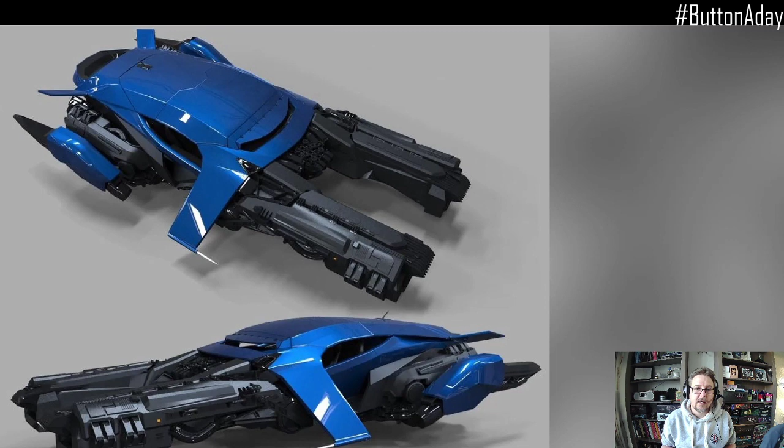It looks like a scary project, but we are gradually breaking it down bit by bit, day by day, and yeah, don't panic, we'll get through this together. So let's open up Fusion. This is where we got to now.

In yesterday's video, I was desperately trying to show you guys how to do a 3D spline for our ribbed hose feature that we have down here, and for the life of me I couldn't work out why it wasn't working. I'm just going to cover this straight away. Let's turn on our edges again so we can see what's going on. There we go. We have to activate the ability to do 3D sketches in Fusion.

So if we go up to, click on your username at the top and then into preferences, there we go, and under design we've got here allow 3D sketching of lines and splines, and we just want to tick that and choose apply, followed by OK.

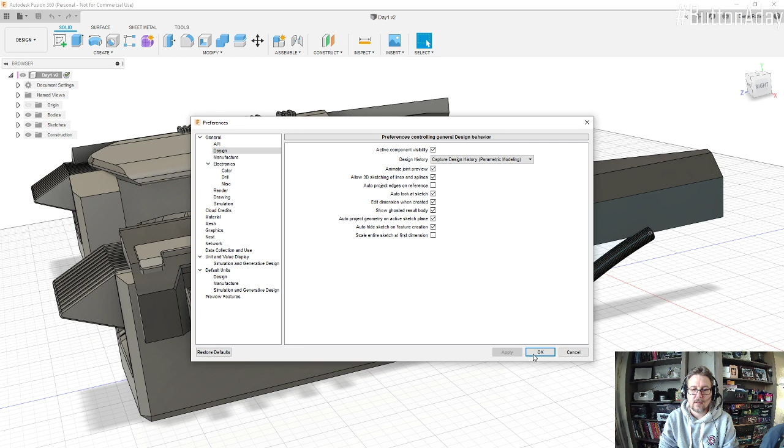So now we should be able to click on any of the points on our spline tool and then move them in 3D space. You can see it's now changed our pattern along a curve feature to match that spline as we've now changed it. So yeah, that's all good. I'm happy that now works.

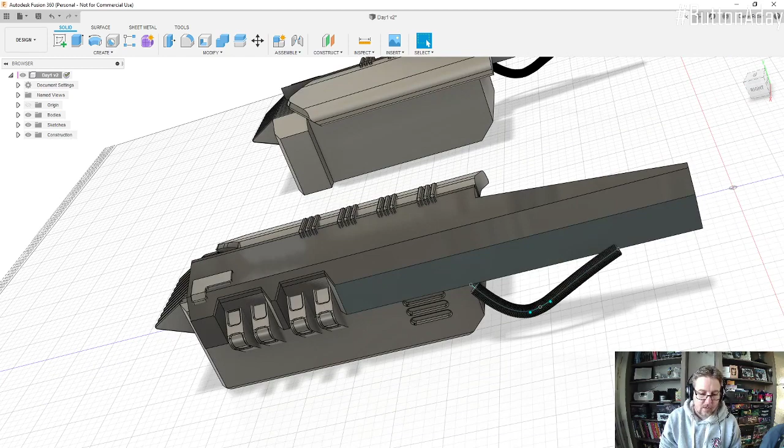So if we call up our reference image, what we're going to try and cover today, zoom a little bit more, okay, is this hose section here that we've obviously started. It goes up around here by the looks of it, we'll make a nice little round end cap on this side, and we'll put a round end cap on this face here, and then we'll change that spline so we get a nice neat curve coming round of it. That'd be a good thing to do, I think.

I'm reading this space here as a void. Maybe that's just shadow in there. Maybe there's something going on here. Again, we'll try and interpret that. We'll try and get into a bit more of this back section here, just so we can start sort of joining all of this up. Yeah, okay, let's go.

So I'm going to wind backwards through our timeline. So if you've got a timeline that gets quite long and it kind of fills up over the length of the bottom of your screen, you can use these little controls here. So this will move straight to the end, and then we can find our little pickup point so we can move backwards. Let's get rid of our mirror. That's our pattern along a curve.

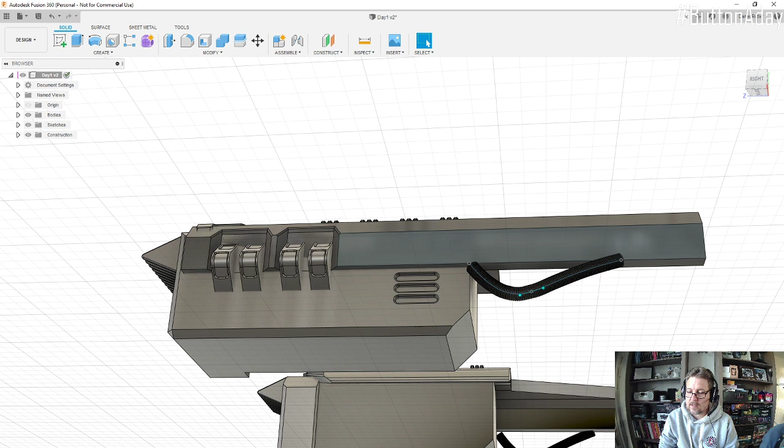We'll go to there. So we've just gone to before we drew our spline. And that's because I want to make some reference circles, and then we're going to go back to the spline, and then we'll move the spline to match up with those circles.

So if we start a new sketch, click on a face. I'm just going to draw in a little section in here. We can give that a dimension by pressing D. Make that 90mm. We can reference it to a line so we can move it about later.

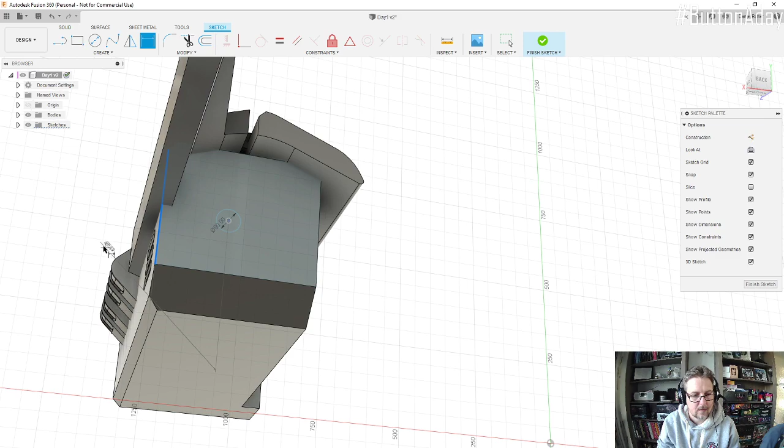Okay, so this sometimes happens. I'm sketching up here. Now this will be because we now have 3D sketch enabled, which is here. Okay, we all make mistakes. Let's delete that. Start again, click our circle, we'll turn off 3D sketch, then that way what we're sketching is always staying on this plane.

Spin that back round. 90mm. Can reference that. So from the outside edge to the center.

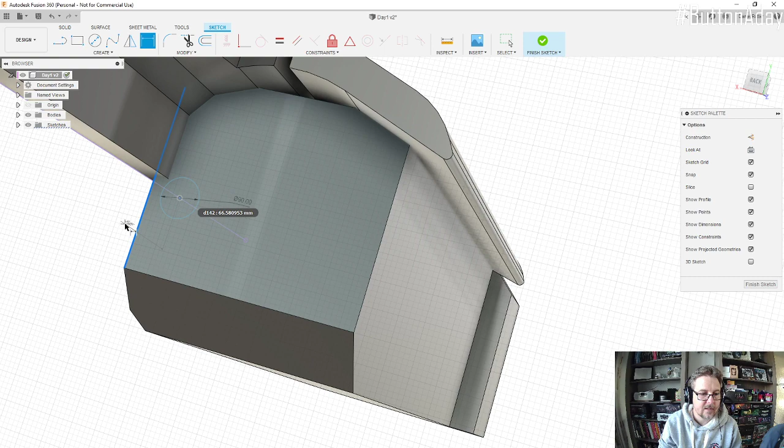I'll change that to 0. What I'm going to do is finish that sketch, then delete that sketch. And most importantly, we're not going to panic.

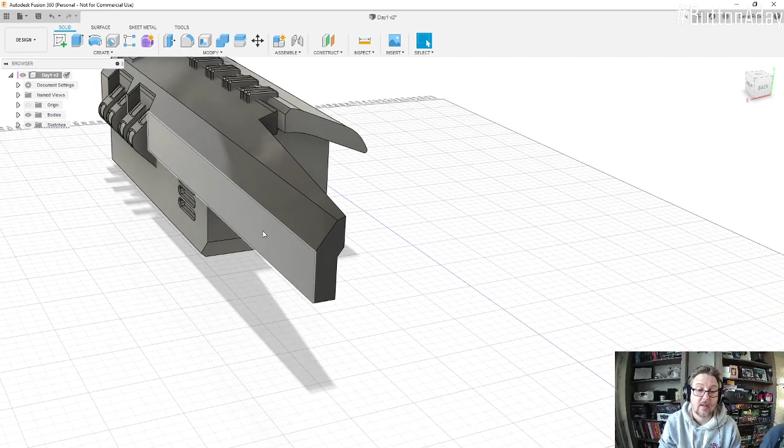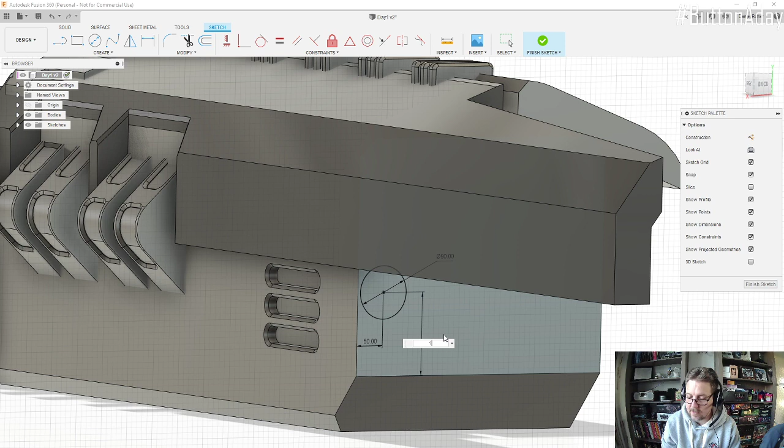Create a sketch, choose this plane, have 3D sketch turned off. Specify our distance, so it's a 90mm circle. There we go. Because I started the sketch with 3D sketch enabled, that's why it stayed like it even though I deactivated it. And then we can change the height, I'll bring that down a little bit, say 130.

Finish that sketch. Extrude the shape just a little bit, maybe 15mm. Make it a new body. Okay, just got a little chamfer detail around it, something like that. Okay, that'll do for starters. That's where our hose is going to plug into.

I'm going to put one on the side here. Now we don't have anything to draw that on at the moment, so we might just quickly block out this shape underneath. So go back to Fusion, start a new sketch on this underside face, and we'll just pop in a shape for now.

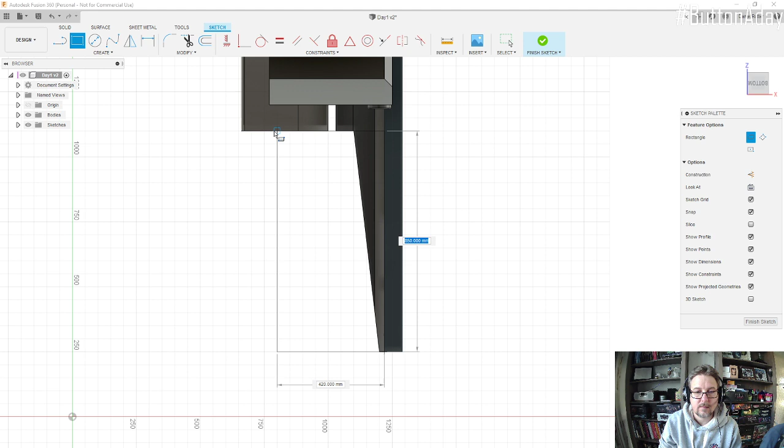Something about that. 550. Let's try that again. Double click 550. There we go.

I want this line to be in line with this. Now, if I knew that measurement, I could specify that here. Or what we can do is use relationships. So if we select one line, hold down Shift, click on the line we want to have a relationship with, and then we'll choose horizontal, vertical. Or we can do coincident.

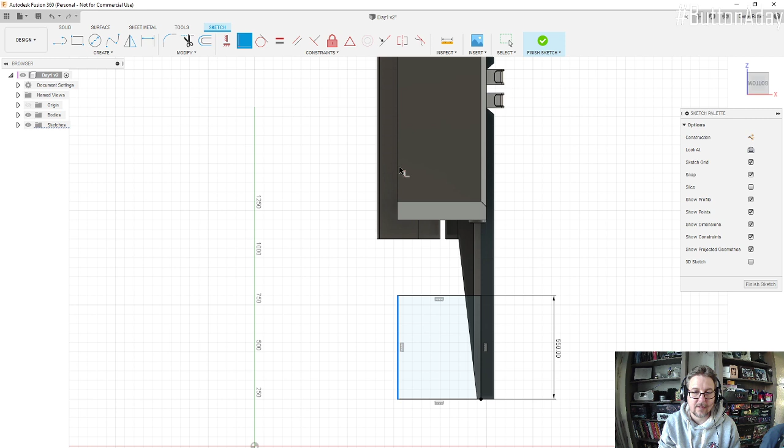Select this line, hold down Shift, and choose this line. Why does nothing like me today? Let's try this again. Equal to, parallel to, perpendicular to, collinear. This line and this line.

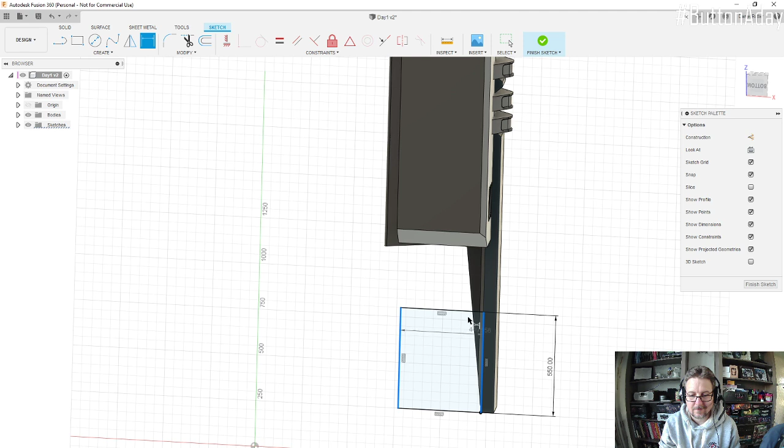Do you know what? Let's just add a dimension. 550. 500. Okay.

Finish our sketch. Go up to extrude. Select our object. Bring it down. I'm going to leave it as a new body because I'm going to go back and slice this up and make it look a bit cooler. I just want a surface at the moment to work on. So press OK.

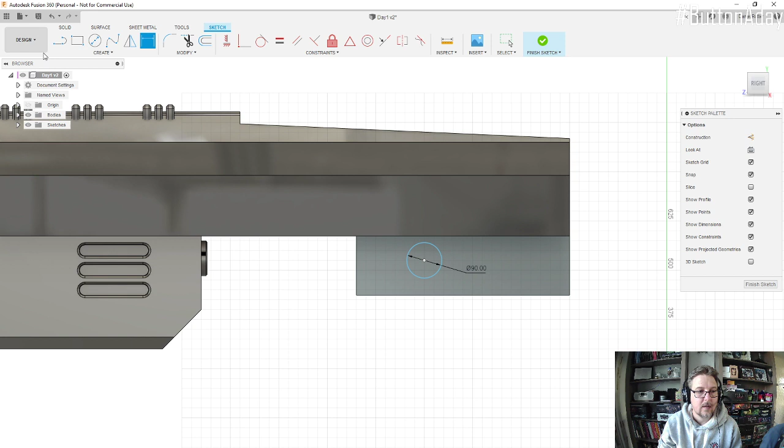Once again, create new sketch. Select our surface. Draw ourselves a 90mm circle. Once happy with that, finish the sketch. Extrude the shape, did 15mm before. Keep it as a new body. Okay, add a little chamfer. Okay.

So now if we move our little timeline along one, we have the sketch for our spline. And if we edit that sketch, we should be able to select these two parts here. We can delete this relationship.

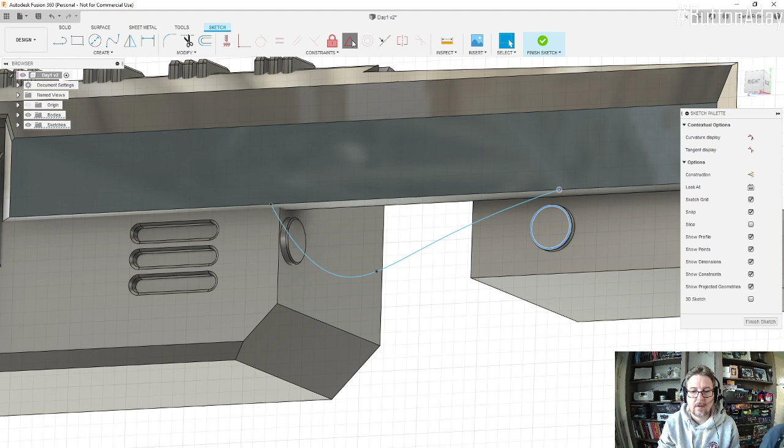Tell you what we'll do. We'll come back again. And we're going to create a construction axis. And we are going to do this as an axis through a cylinder. Do that. Okay.

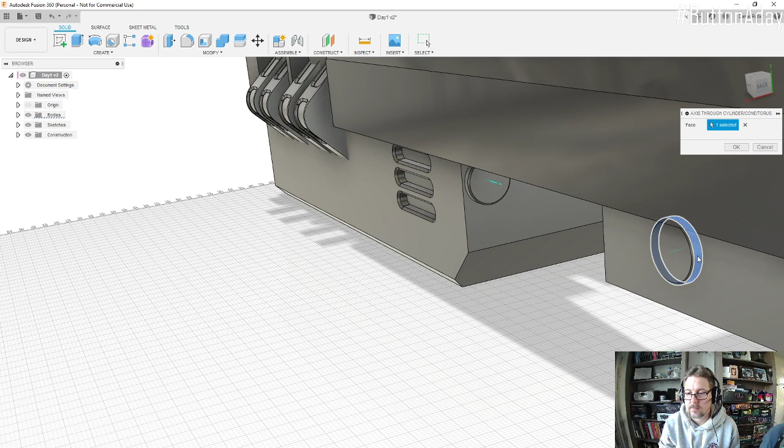I'm going to create another one of those over here. Okay. Back to our spline tool. Edit the sketch. Select these both points by holding down Shift.

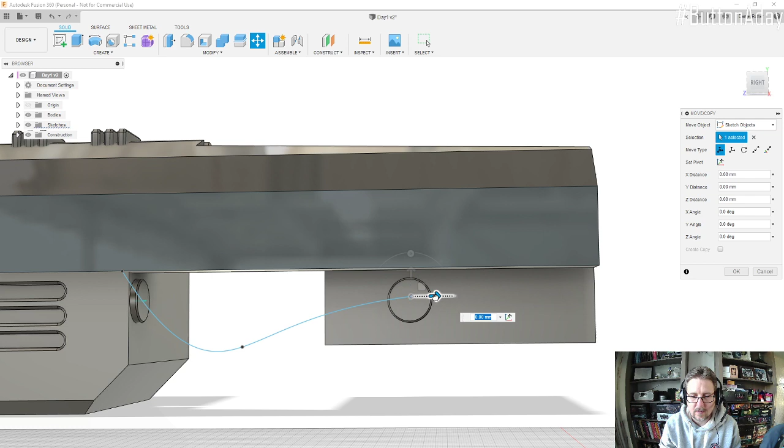So what we're going to do, we're going to finish the sketch. We're going to grab our move tool here, and we're going to manually just place these in. We shouldn't have to do this. I won't lie to you, it's annoying that we're having to do this now.

All of that, we'll grab this end, move that down. Doesn't want to move. Okay. Edit that sketch.

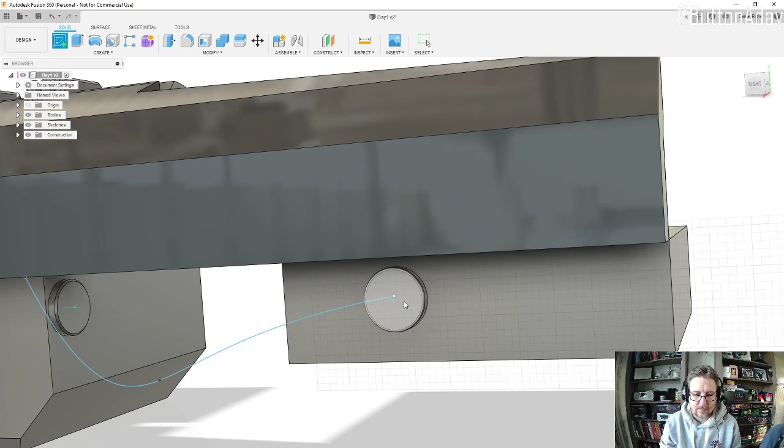Finish that sketch. What we're going to try, we'll do another one. We'll create a sketch. We're going to select this face. Use our spline tool. I'm going to select from the center out to a point, and then back to a point. And this time we will turn on 3D sketch.

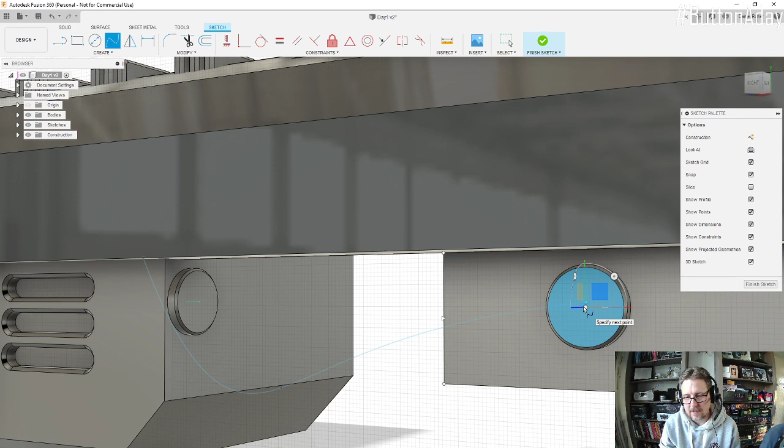Create a sketch, select a face, 3D sketch is on, spline tool. I can select that point there, we'll come out to this point here, rotate round, snap, and we're going to come in to that point there. Oh, magical.

Double click, and now we can grab hold of these endpoints, these green points here, and we should be able to move those around. We have actually created a 3D sketch, which is something at least.

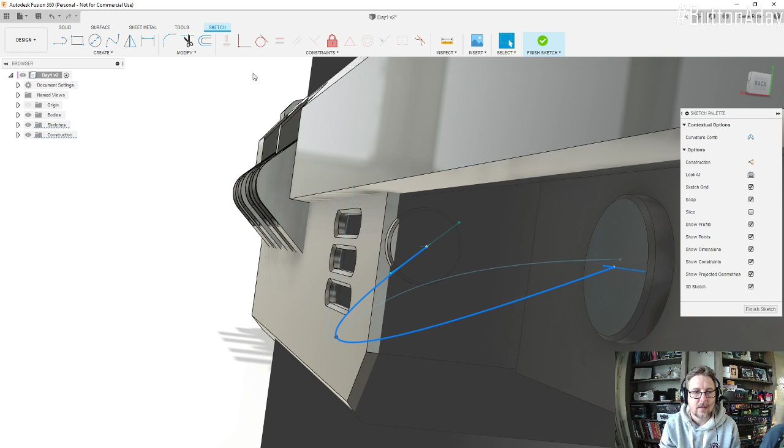Select this tool and this line, make them tangent to each other. That's what I'm on about. Okay. And then we can select this line and this line, and again make them tangent.

Alright, finish our sketch. Now to save any confusion, because there's bound to be some, we will hide our spline that we've got here. We'll click on our sketches tab, select the spline, and we can just hide that. And we're good.

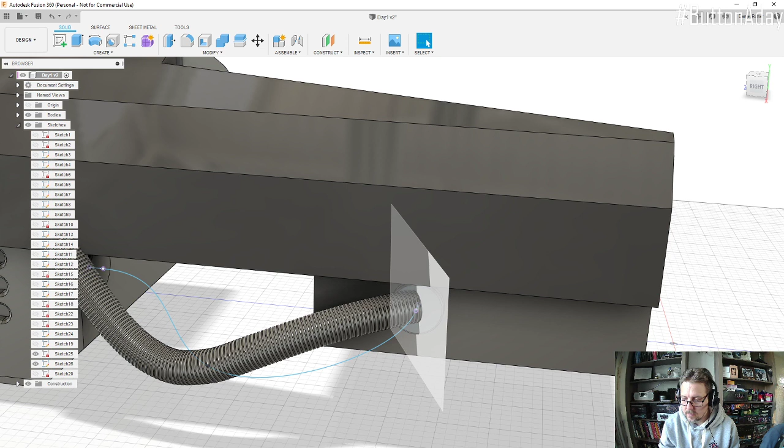So let's go through making our pattern along a curve again. That was our original one, and I'm just going to delete all of these features, including the combine. So delete. Yes, I do wish to delete. Okay.

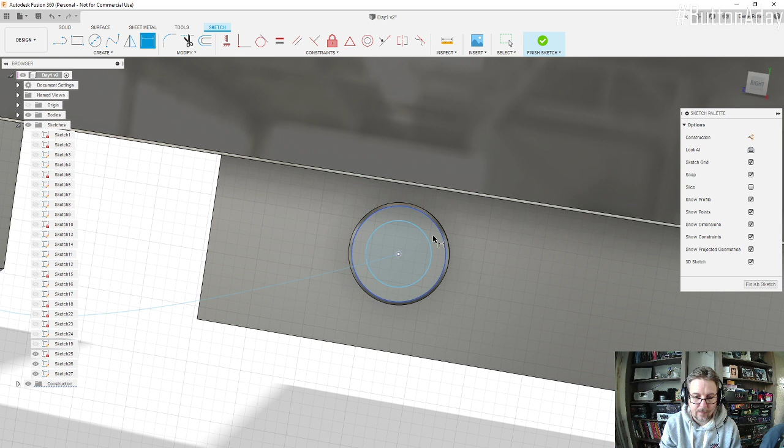Create a sketch. We don't need to worry about making one tangent or in line with the spline, because we've already made this spline in line with this face. So we'll start a sketch on that. We'll do our one rib of our hose. Let's make it like 60 mil. We will go finish sketch.

Extrude. Make sure we pick the right shape. There we go, give that a thickness. Let's make it a little bit chunkier this time around. Let's go 12. Now that's my thing of always pressing enter after I type in a number, and that not necessarily being the correct thing to do.

So we'll edit our feature, and instead of join, we'll have that as a new body. So we can now add a couple of fillets again, so we can just make that look like a rib. That looks good. Okay.

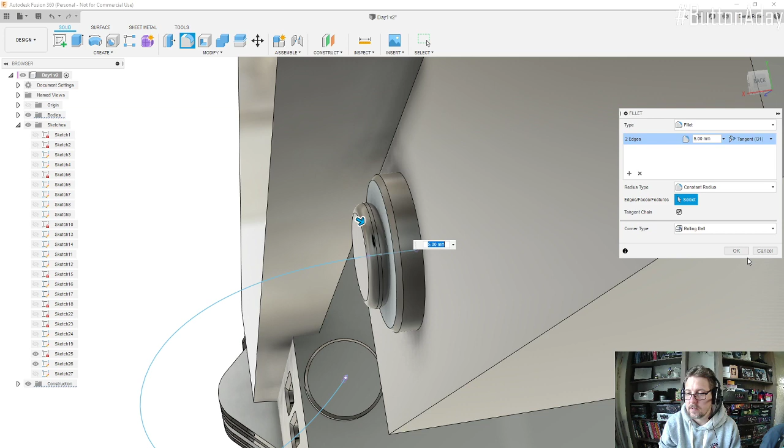And then under create and pattern, we have pattern on path. We want to pattern a body, so we can select the body and then we can select the path. We want to pattern across the entire distance of the curve.

Just rotate round and we can just drag this around like so to the end. And again, you see how these are obviously pointing the wrong direction. It's because we've got the orientation set to identical. So we change that to path direction and now they will follow the path around nicely.

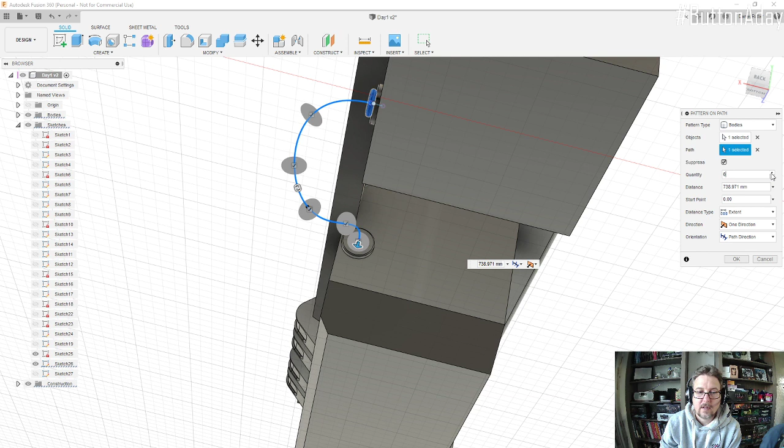And then we just up the number of repeats until everything intersects. I think we did about 80 last time. That looks pretty good. Once we're happy with that, we press OK. And there's our hose.

So if you remember, we now have a huge list of bodies running down here. So we just want to check where our first one is. So we can select it. And that is body 182. And our last one is bound to be at the bottom of the list. Yep, 261. So we can go to combine.

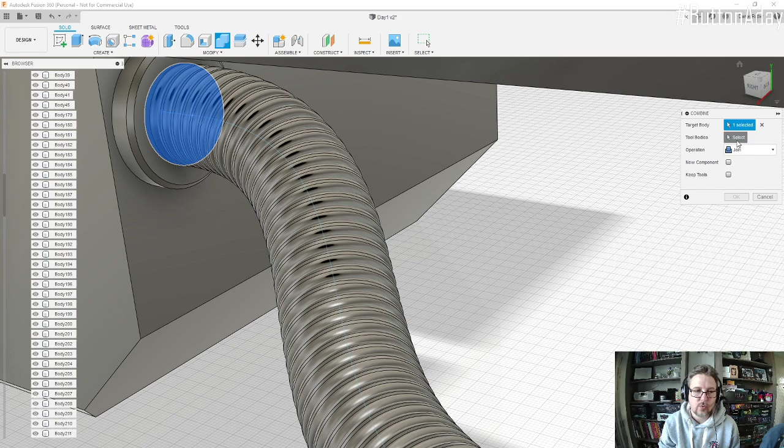181. So just press down shift and select the toolbar. Okay, right, so I did this last time as well. Target body, we have to select a target. In this case we'll keep it as this end one, and then we have the tool bodies, which are the bodies we wish to add to it. So we'll select 181, no, 182, there we go, get rid of that one.

And then come back to the list, hold down shift, and that should select everything. Everything's set to join, we can go OK.

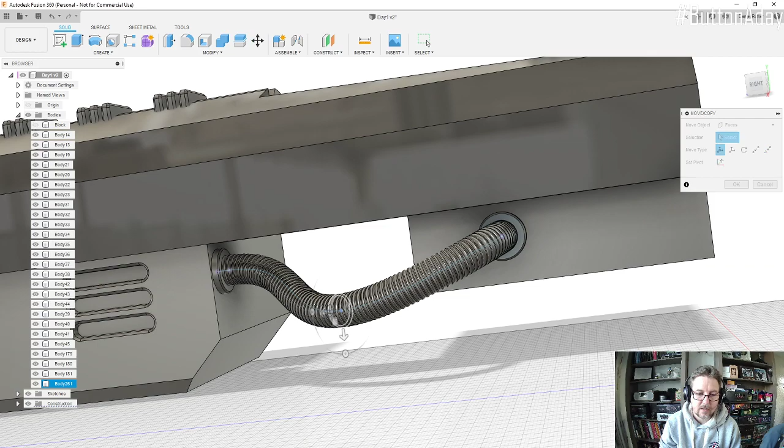So as we were doing earlier, we can now go back to our spline tool, this one here. We can choose move, we can grab hold of this bottom part, edit the sketch, select that part.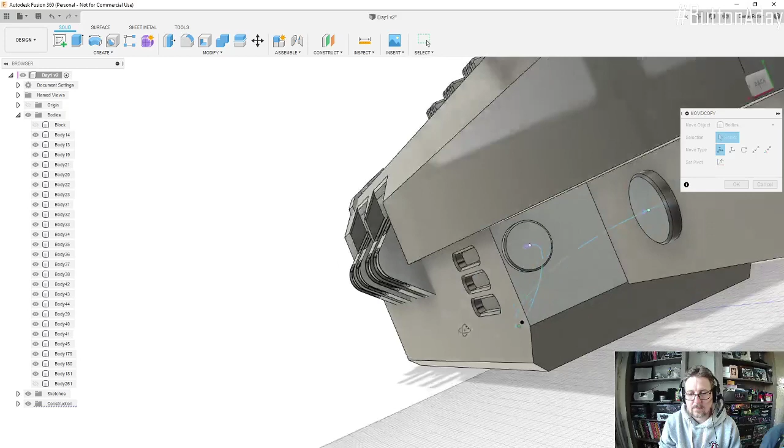Oh, ever had one of those days. Hide the body, let's do that. Edit the sketch. I like it as it is.

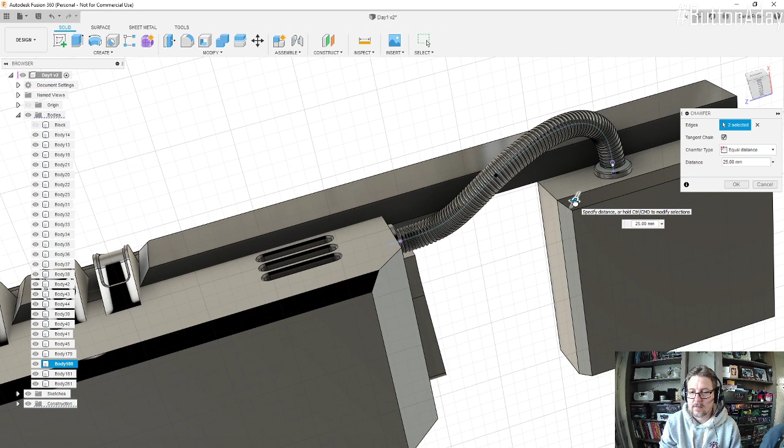Right, okay, let's start adding a bit of a chamfer detail to this. Now, we should do that using the chamfer tool. And that should be quite interesting if it just goes slightly beyond where our plug is. Instead we just have that now running straight back in.

So let's start a new sketch. And here, go to create, project. I want that information there, so I've selected that face. Okay. Finish the sketch and extrude, run that in like so. In this case we'll have that join. Nice.

So there's a detail just on here, this piece. Let's make that line a little bit bigger. There we go, this piece here.

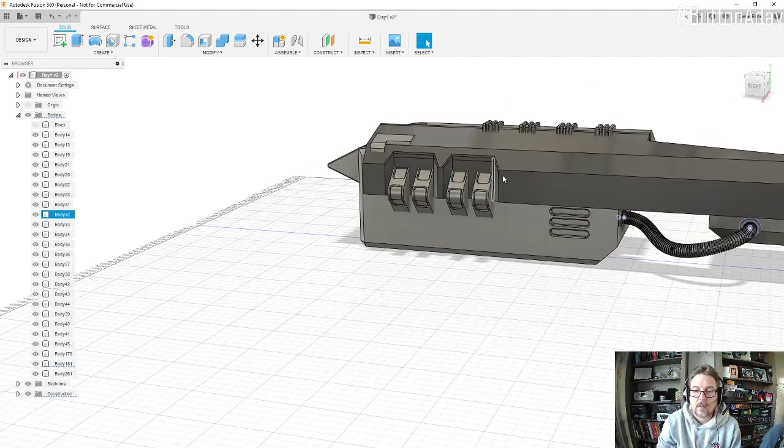Now what I'm thinking is we'll take a general shape, extrude it across, and then we can use the draft tool just to change the angle, just so we get this sort of subtle slope running down from it. So let's choose our front sketch. We'll draw a shape. We'll turn off 3D.

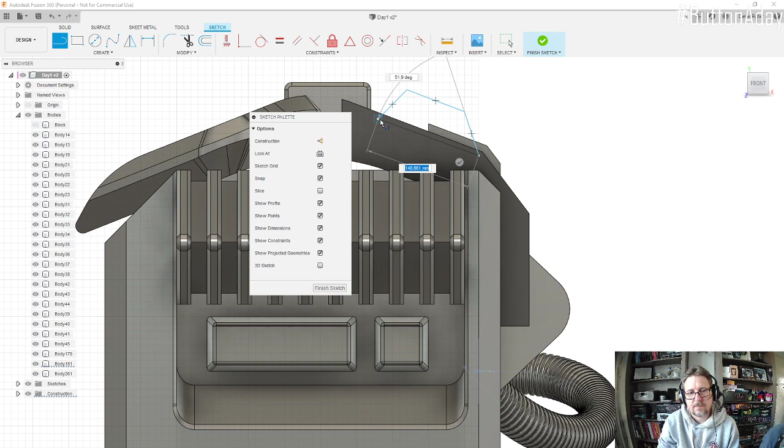I don't like this 3D sketch, it's really weird. We'll draw a shape, it looks like maybe it's something like that. Again, just sketching stuff out, not being too precious about it.

Finish our sketch, extrude, choose our shape. We want that to be a new body. I'm going to change the offset.

It starts slightly further back than that, so maybe go -500. Yep, something like that. Okay.

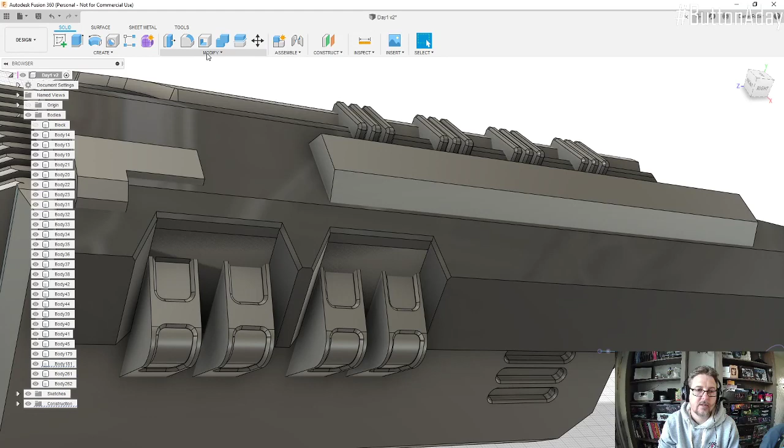Now we looked at the draft tool before, briefly. We'll have a look at it again now. So under Modify and Draft, the first face you select is the one you would like to stay at its orientation, and then the second face is the one that we're going to move. We get this nice little tool here.

Just notch that around just a smidge, maybe -5 degrees. Oh, too much. -2, -1. Yeah, that looks pretty good.

Click OK. Do the same thing again. Draft tool. This face followed by this face, and then we'll do the same thing, -1. Okay.

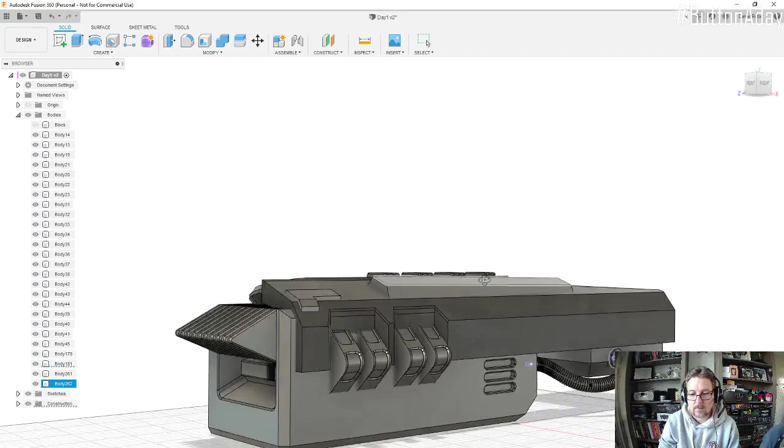Gives us that. We can add a little chamfer on here. Yep. Okay. Sort of starting to look like something. Okay.

So I said we would look at this round section here, just so we've got something going at the back, and then we can work out how we're going to connect this front section to whatever's going to happen at the back here. So we can look at sort of where that is.

Looks a little bit further down, almost resting, almost at a tangent angle to this, maybe a little bit higher. So let's just draw something in and see how it looks.

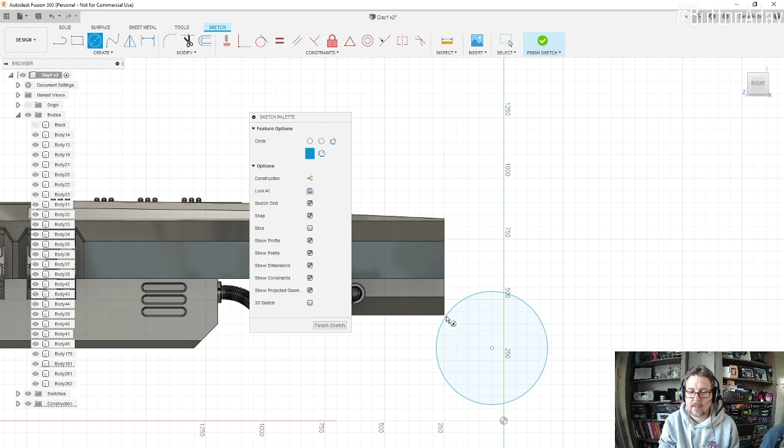So create sketch, choose our plane, make sure 3D sketch is off unless you need it. I'm going to go about here, or maybe a bit smaller than that. Let's try 400.

Hit escape to come out of our dimension tool, and then I should be able to pick it up here. See, move it about. So sort of pop that there like so. Finish our sketch.

Extrude our shape. Now because it's intersecting one of the other bodies here, you know, it thinks you want to cut it. We don't. We'll do it as another new body.

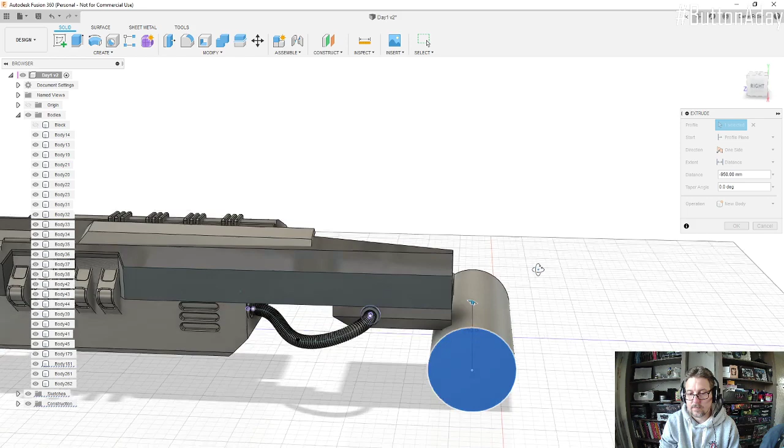And if we do, instead of distance, we choose up to object, and then we selected our center plane, it's going to take us straight to the middle, so when we mirror it, those two parts are actually going to meet up.

Now, I think it should sit ever so slightly proud of this face. So we've got a couple of options. We can either do the offset to the plane and set it to a minus, or we do also have an option of doing a two-sided tool.

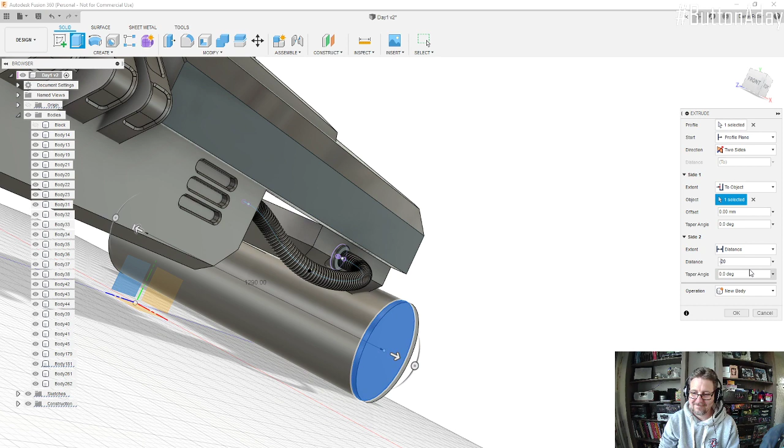So now we have all our settings for side 1, which is what we've got going towards the center, and then we have our options again for side 2. So in this case we can just set a distance of maybe 20 mil minus 20 mil. When we're happy with that, press OK.

So again, we can add a little chamfer in here, something like that.

Okay, I kind of think that this needs a little bit more detail than here, although it looks like it might have some detail on it. Let's zoom right in. So we've got this little brace arm coming across, there's a little line, maybe this pixel here is like a little screw fixing or something like that.

So let's have a little look at what we can do. Create a sketch on this face. We'll draw our circle. This is going to be for that little sort of split line.

We use our offset tool, something like that, -4.

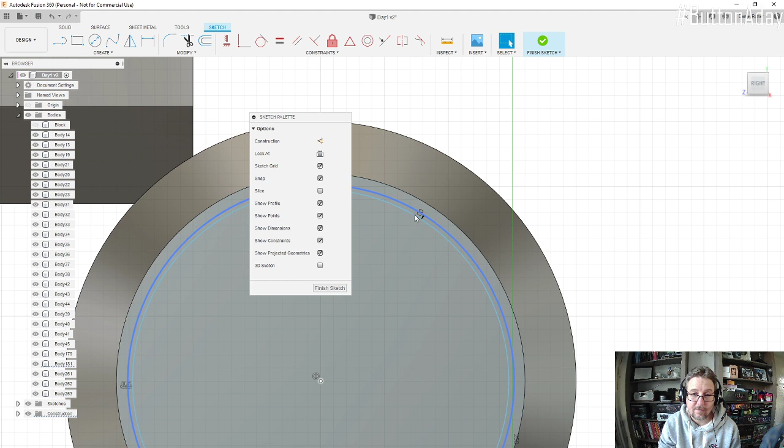Now we've said that is a 4mm offset, but what we've not specified is the diameter for that outside circle. What's nice is at the moment it's at 302.654919. Nobody's going to machine anything to that kind of tolerance without a lot of money. So we'll change that to 300, and we've still kept our 4mm offset. So that's quite handy, being able to define things like that and then tweak the outside dimensions.

Finish our sketch. Do an extrude. Zoom in so we can select the little space between the two lines.

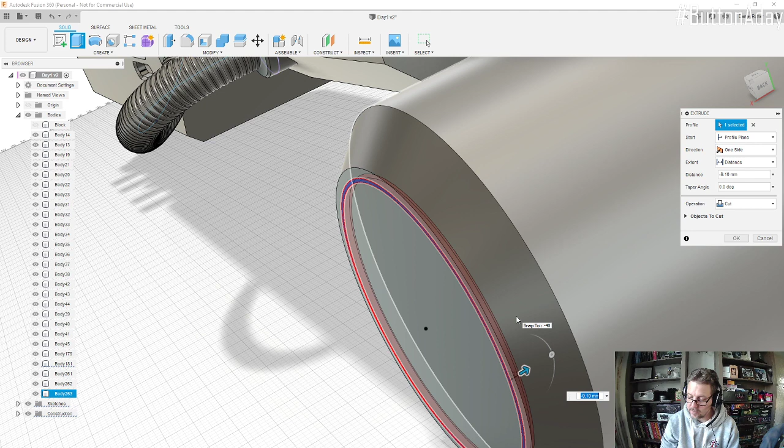And then this is one of the few instances we do actually want it to cut. So we'll do say a 6mm deep channel.

Now usually I will say if you've got a channel that's 4mm wide, to cut deeper is an awkward process because you're obviously using a very small cutter. So quite often you have no problems doing a channel that is the same depth as the width, but this instance, you know, we might end up having to make that a little bit shallower.

In fact, let's do that. Let's make that a bit shallower now. So we'll edit feature, we'll change that from -6, we'll keep that to -4. Then we know we're not going to have a problem.

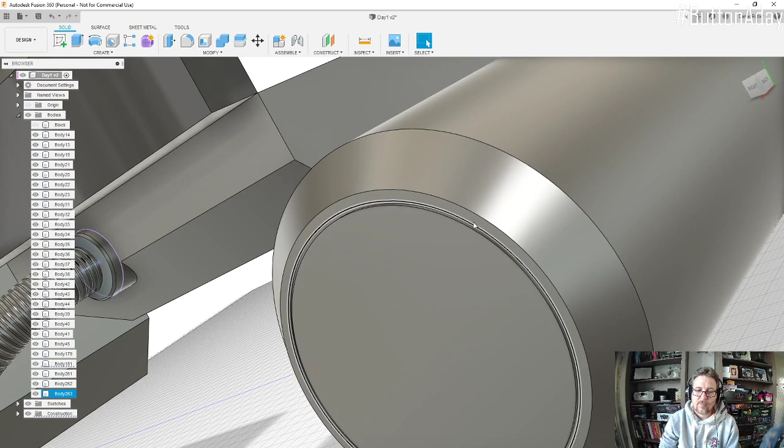And if we're worried that in our overall design that little channel detail isn't going to really stand out too well now, a neat little trick is to add a very small chamfer to it, maybe just 1/2 mil. Let me set that to maybe, let's go 1 mil. I'm used to making smaller things.

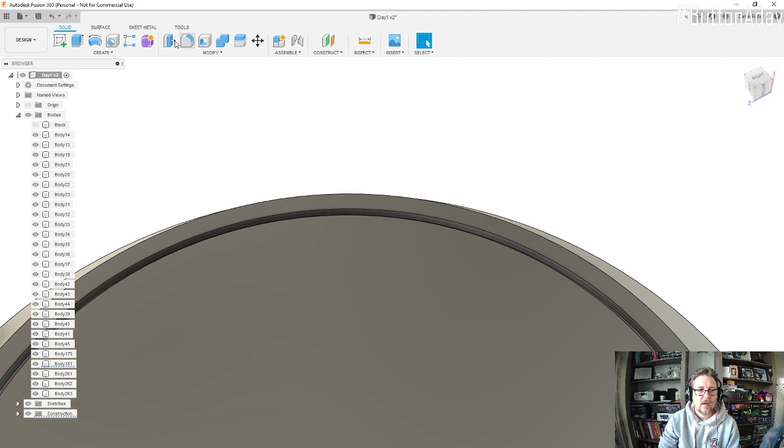Let's edit that feature. So I would like to select 2 lines, this line and this line. Ooh. So Fusion is constantly being updated, and that is only a good thing. I would like the option to be able to add lines to my selection. So let's try that again. Before we set any depths, we select our lines. There we go, 1 mil. Enter. So that would now just read as a wider line.

So let's do that sort of little screw detail. So again, we'll do create a sketch on this face. Just do a little something like that. It's more of a bolt than a screw at 20mm, but never mind. Finish sketch. Extrude. Select our profile. Just want that to cut through. Maybe like that. Let's go -33. We can add a little fillet just around this outside edge here.

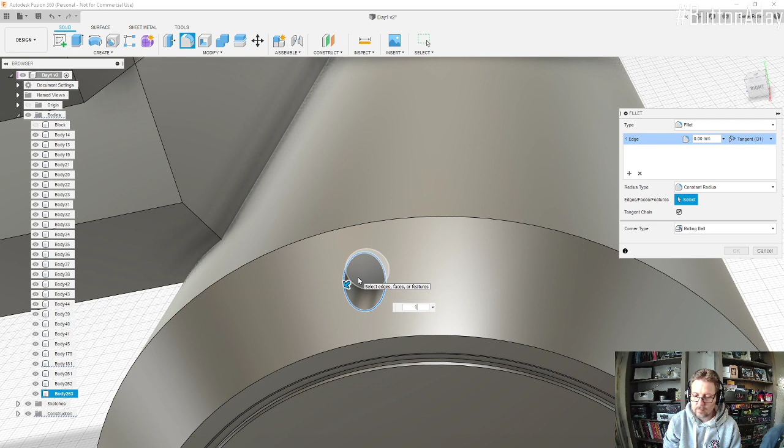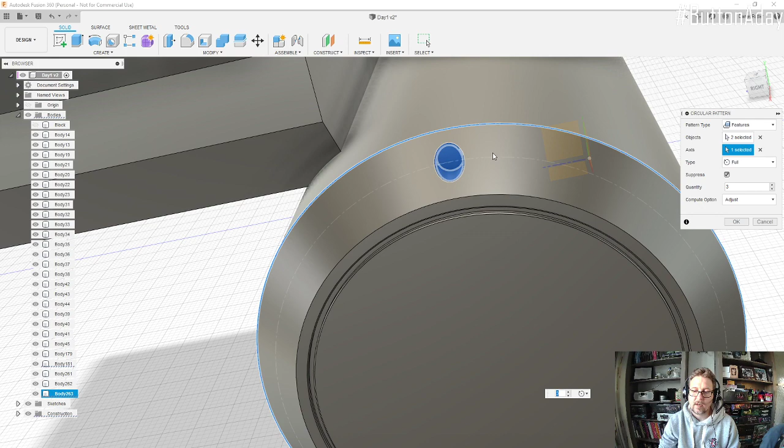And now this is a great use of a pattern again. So under create and pattern, we've got a circular pattern, and we want to do features, and we want to do this cut like we've just done, and this fillet. Next thing it asks is the axis. Now it doesn't have to be an axis line like we created earlier, it can just be an outside circle. So any of these circles, you see they're all highlighting up, they would be fine to use. So click on that. There you go, it's patterned 3 of those around.

You do have the option of do you want to do a full circle or do you want to do a particular angle. And odd numbers always look nicer than even numbers. So let's do, well, I'm saying that, 6 doesn't look too bad. 9 kind of looks cool. Let's go for that and press OK. So you've instantly got a little bit of detail on the go there.

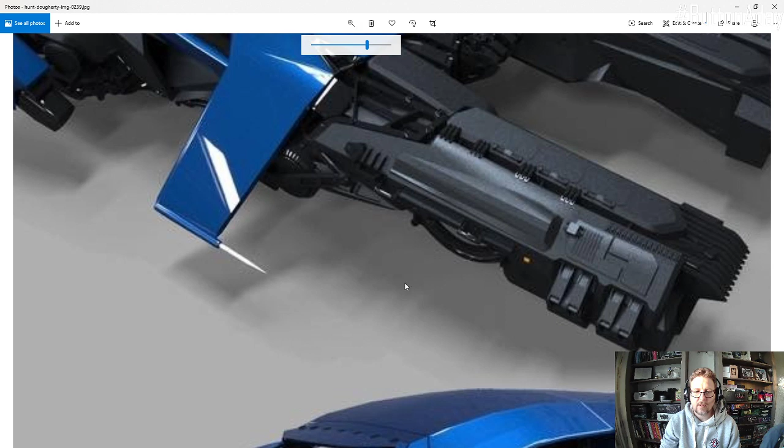Let's have a look at that sort of bracing arm that we had going across here. See what that's all about. Let's zoom in on our reference again. So this looks like a little sort of a square bracket. This little arm up here, some holes cut in it, maybe some sort of pin and something to receive that pin on our body here.

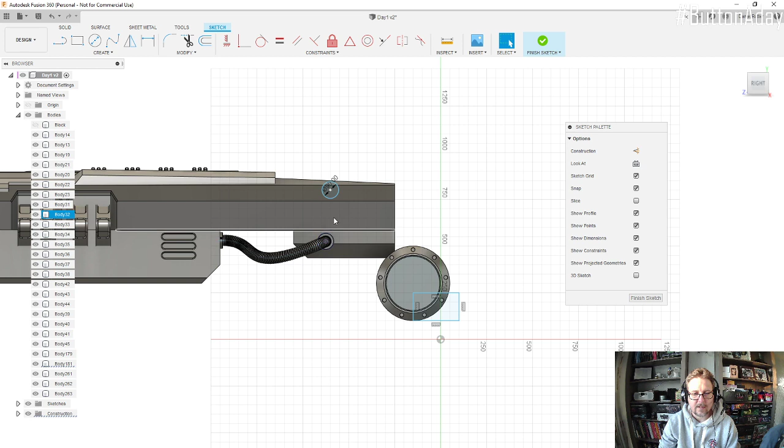Okay, so you know what I'm going to say, let's create a sketch. Pick this face, just draw that sort of box shape, something like that maybe. Yep. Just going to move this over here. Go back to our line tool. Actually, let's put a circle up here so we know what we're sort of aiming for. I think we'll do that as a 90mm again. It's sort of in the same language as these. We could do a little offset line coming in from that, so that's our sort of outside shape. That's going to be our plate there, so that is -20.

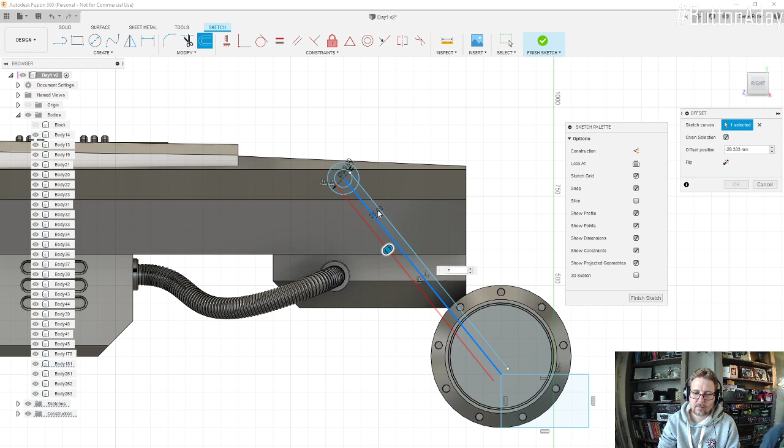And then let's take a sort of a center line here. Do our offset tool again. Do 25. Offset this side, 25. I think we could actually do, we know we want these to be equal. This may or may not work. It certainly works in SolidWorks. We can type formulas into these bars as well as doing simple sums and maths if you want to work something out on the fly. We can press equals and then select another measurement. Yep, no, that's not going to happen on this one. That's something that hopefully they can add to it at a later date. So anyway, we'll do -25 on that as well then.

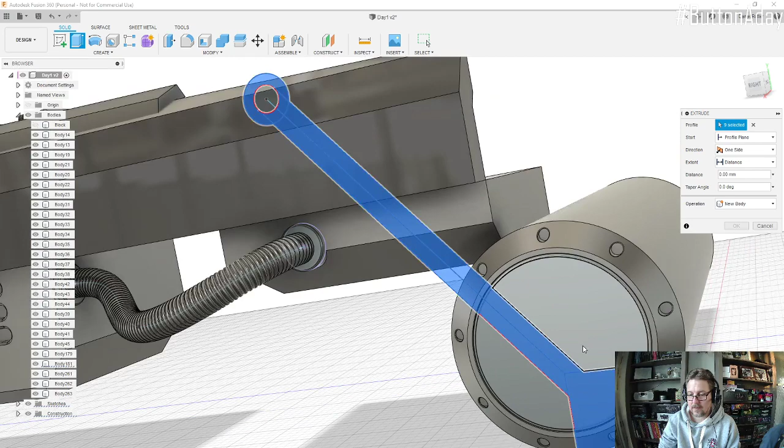So we looked yesterday at extending lines. Save having to draw another line through here. We can go into modify and extend and just make sure everything kind of meets up nicely. Like so. And now we can finish our sketch. We will extrude all of that, so we have to select all these parts. This one, this one, this one, and this one. Give that a thickness.

Something like that. Now, it's usually good practice if you're going to manufacture this. You probably don't want this face inside here resting up exactly on this face here. So it's always good to just add a little offset, even if it's just a couple of mil. Okay.

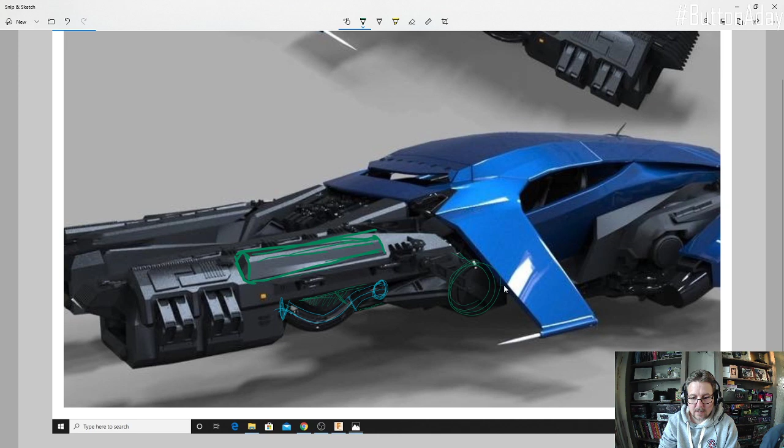This all looks a bit weird. So we can go back, just double check on our reference, what do we think's going on in there. That one. Bit dark to see really. Now, that all looks really cool. Look forward to doing that tomorrow.

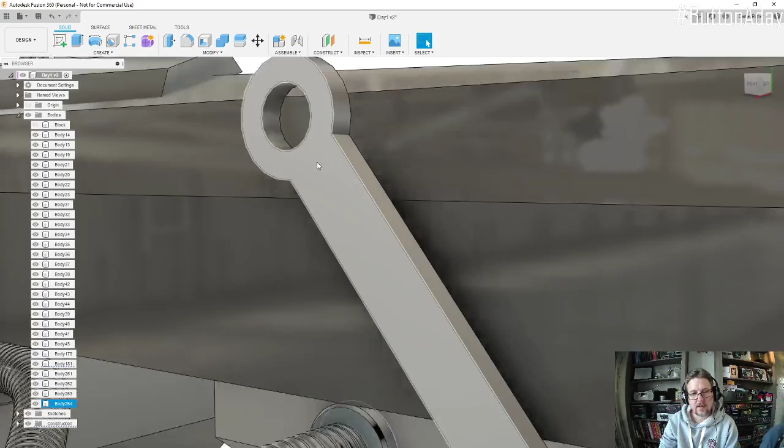We can do a fillet. This is certainly the strongest option. We're going to manufacture this. Bring that out. Something like that. That kind of looks cool. And if we really wanted to, we could do a smaller fillet on these edges here. Like that.

Okay. So let's do some little inset details in here that we can then pattern down. So we'll start a sketch on this face. Just so we've got it for reference, we're going to project that line information. So again, under create, project, include, project. We can then select that face. Now we've got something that we can maybe offset, so we can say, okay, we want at least 8 mil of material clear through there.

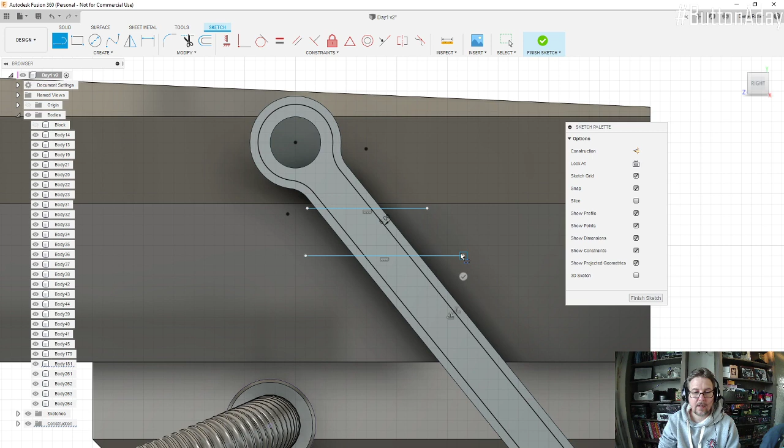And if we just do a couple of horizontal lines, I think, something like that. Escape to stop drawing a line. And another one there. Click finish sketch. Go up to our extrude, select this segment, and we're just going to push it in by 6 mil. Minus 6. Like that.

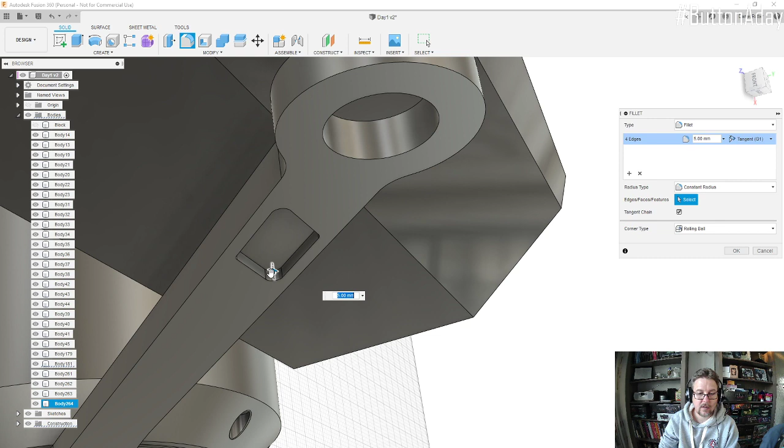Again, we can sort of add a small fillet to these. So if this was going to be CNC'd, you always end up with a fillet on these internal corners because of the diameter of the cutter. So it's always useful to have these selected and something that you can then tweak and change as you communicate with the people who will be machining it for you. That's good, that's a 10 mil diameter.

And then we can use our pattern feature. We're going to pattern the feature. And we're going to choose a direction. Now normally we've done horizontal lines, but in this instance we want to pattern in this direction. And then we can just drag that down like so. Now you'll notice weirdly in our little preview we're missing these corners. And that's because we've only selected one feature to pattern, that was the cut.

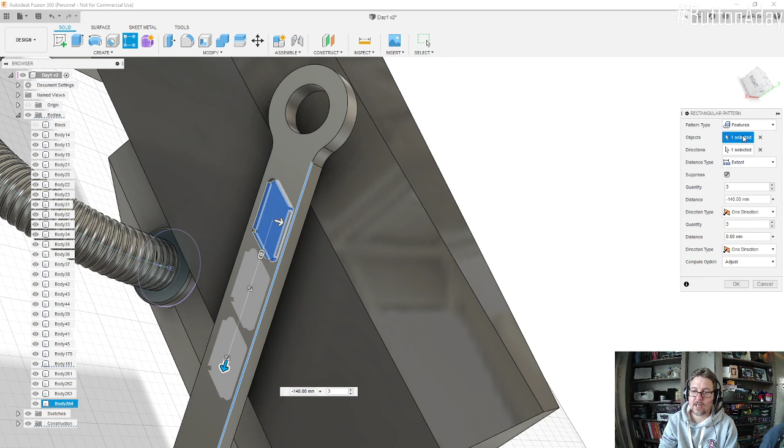So if we go back up to objects, we can then apparently not select. There we go. So you have to deselect your direction line before you can select another object. So we now have our cut and our fillet feature. And then we can do this.

I only have bad days like this so that everyone following along who gets it right first time feels really smart.

Again, I like odd numbers over even. I didn't think 3 was enough. 4 looks a bit weird. Let's up it to 5. Yeah. Okay. That's kind of starting to look pretty cool.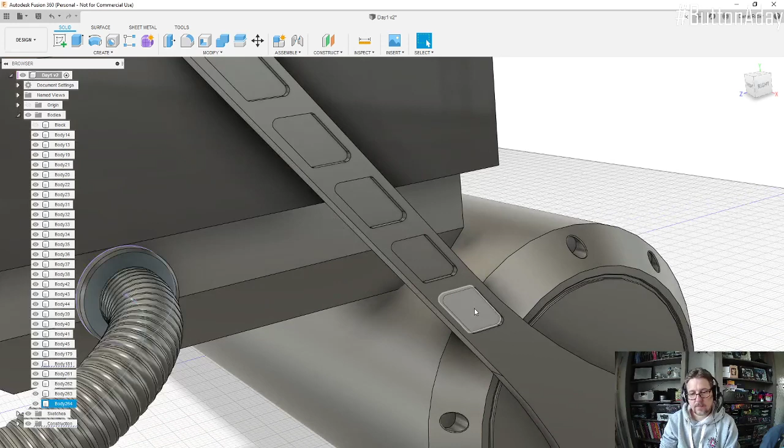Again, you know, my usual little trick, we'll just add a small chamfer around the tops of all of these. 1, 2, 3, 4, 5 and 6. That doesn't have to be much. We're just going to go 3 mil. Too much. 2 mil. Yeah, it looks better. Okay.

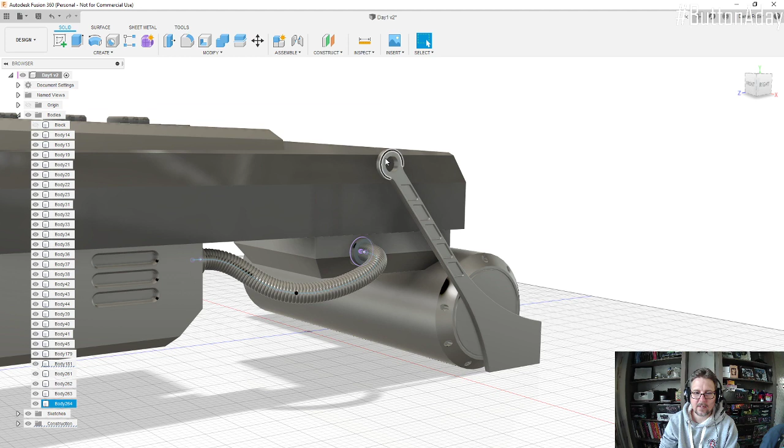Suddenly, if we turn those lines off, that's just going to read nicer. The edges are going to catch the light. You get these nice little shines. All of this, and it just means things don't look quite so flat and square, and it'll give you a more realistic render if that's your final sort of plan. Let's turn our lines back on. Shaded with visible edges only.

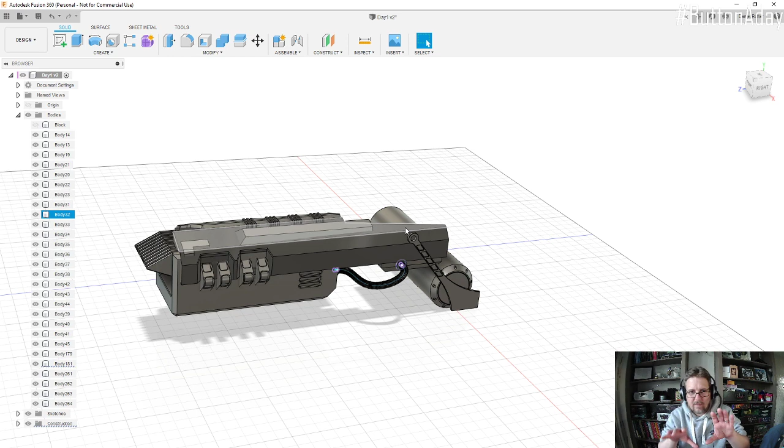And we'll just lastly make a pin that runs through this, and we'll put a plate in here to receive it. Kind of like to think that maybe these are holding the engines almost, dare I say, like pod racers. There's a little bit of flex as it sort of corners. Maybe these have a bit of movement on them, almost like the suspension, I suppose.

So we'll do a new sketch. In this instance, we won't just copy that information. We will redraw a pin, so I want it to be just ever so slightly smaller.

So instead of 50, we will go 45. Finish our sketch. Extrude our pin. We're going to go straight into that. Let's set this to be a new body at the moment.

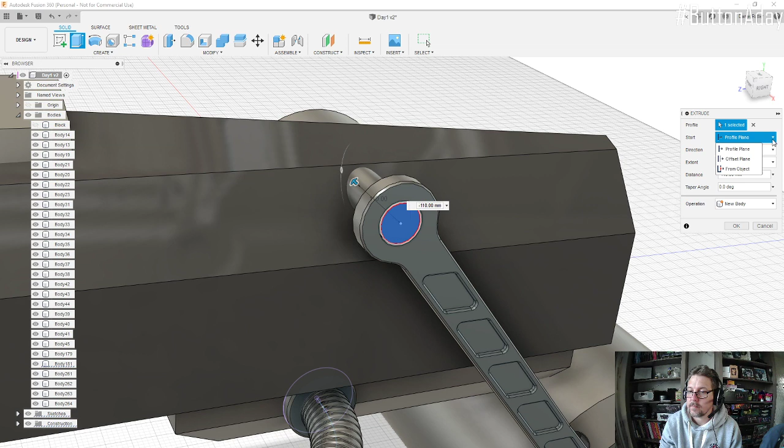And we will do an offset. Offset from object. I'm going to choose this object, and then we'll choose an offset of say 30 mil. And let's change this, instead of a distance, let's change that up to object. And that gives us that.

So the advantage of doing everything rather than setting a distance, but more of a relationship of saying this has to go up to that object, or it's offset this far from the face of that object, is if we press OK, and I decide actually if this is going to be like a suspension for this, that's quite a weedy looking thickness. So again, if I click on any face of the feature that I want to edit, I can right click and choose edit feature.

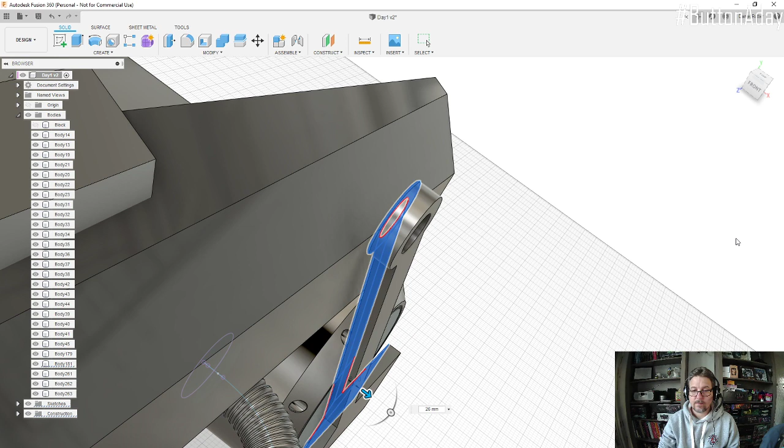We had that 20 mil, but we had a 2 mil offset, so that's only 18 mil. So why don't we bump that up to be 26, and then OK. And what that's done is, so this distance here is still going to be the 30 mil that we specified, because the face that we made the relationship to has moved. So where that new body begins has also moved in relationship to it. Very confusing talking out loud.

Add a little chamfer. I think I'm going to get a t-shirt with add a little chamfer made. 6 mil, there we go.

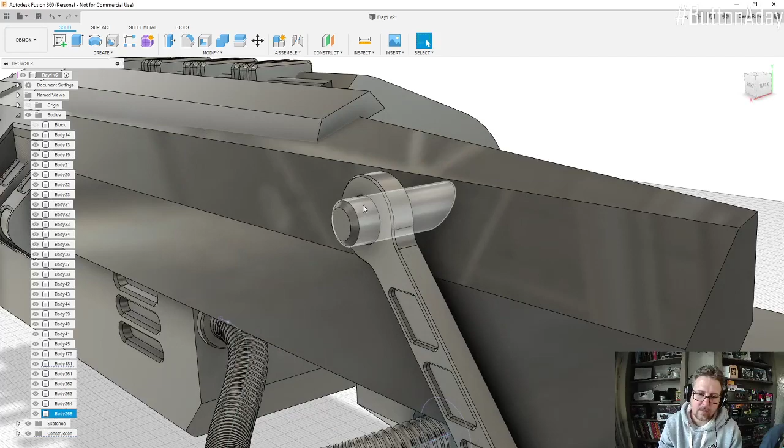We could add a locking pin, but that's all a little bit bizarre. I think we will add something to that. I'm not sure what yet. I do want to make this a bit more robust, so let's do one more sketch. We'll click on this face here for now, rotate round so we can see what we're doing.

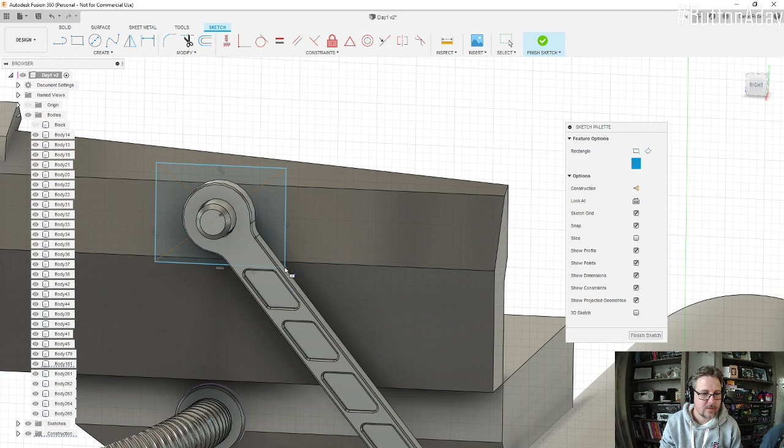I'm going to do a center rectangle just here. We select the center point. There we go, center point, and then up and round, something like that. I don't think it needs to be that wide, so I'm just going to slice it in half with a line. That'll do.

So we'll finish the sketch. We'll go to extrude, and because we put that line through it, I can select either side, which is quite useful. So we'll select this piece and this piece. I'll give that a thickness. That looks kind of cool. We'll do our offset. Do that minus 50. 50. So that'd be a new body.

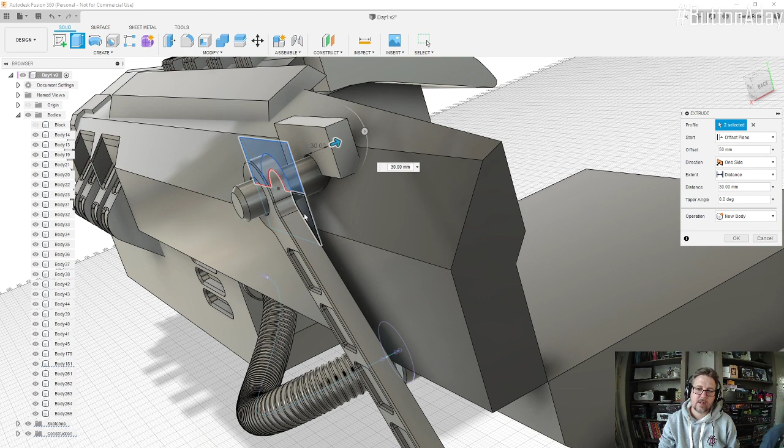Maybe should be a bit more than that. No, you know what? Actually, what we'll do is we'll select the other parts here and here and here, so it can sit in there like that. Okay. I'll add some chamfers up here. Make them quite chunky. Something like that. Okay.

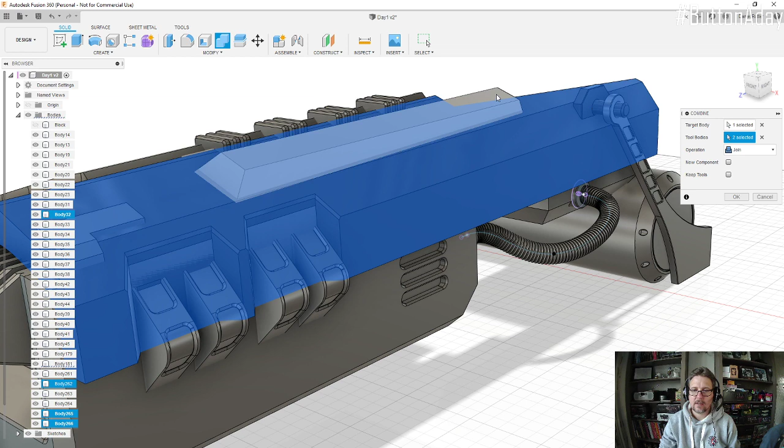So now it's probably a good idea if we start joining some of these bodies up. So we use our combine tool. We'll select this piece here, and I would like our pin to be connected to it, this top piece, and this little indent here. Choose OK. You see now it's inherited the same materials that we'd already coloured that one in.

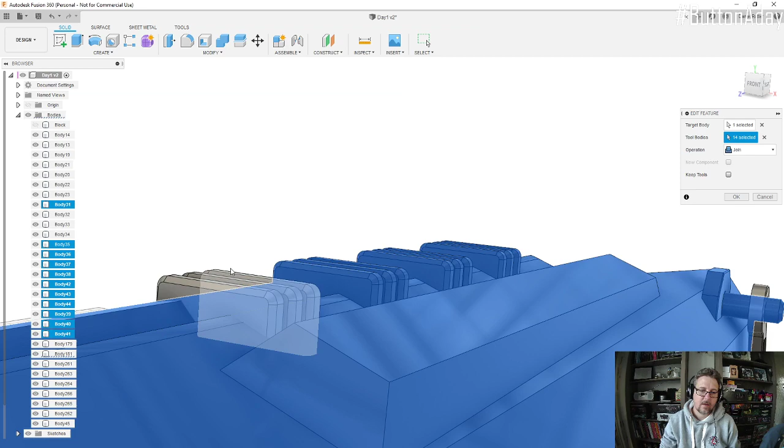So let's do this entire top across here, so we should be able to edit that feature. Select all bodies and continue adding bodies. Like so. Okay. There we are.

So we do our usual trick at the end of the day. We'll just mirror everything, make sure we're happy with the way it's looking. So we go to create and mirror. We're going to do bodies, select everything, and our mirror plane is just going to be that central plane there. Okay.

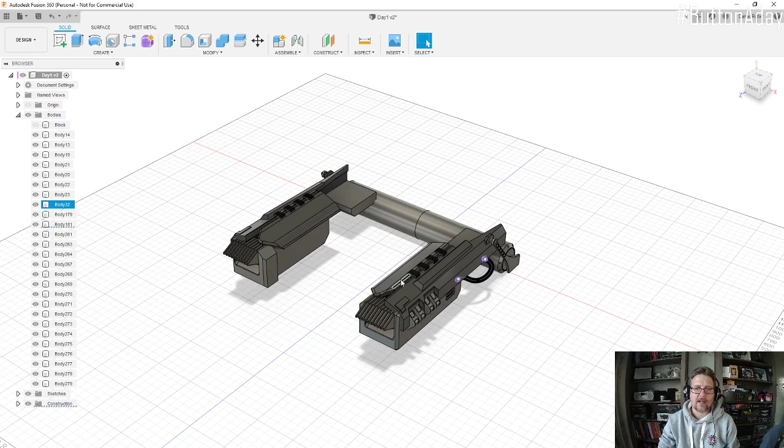Starting to remind me of like Panthro's tank from Thundercats, which is not necessarily a bad thing.

So what we can do is we just pop this over here, bring up our reference, and we'll see. I'm wondering if our gap between these two is too wide. Maybe we have to bring those in a little bit closer. So we'll have a look at that tomorrow and what potential issues that might bring and the best way to deal with that.